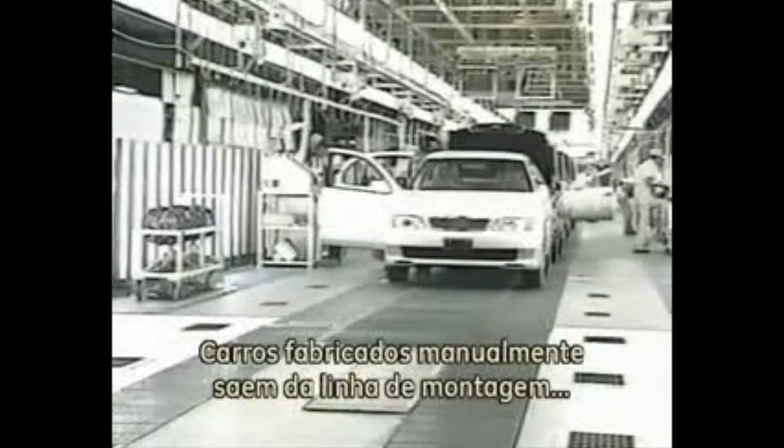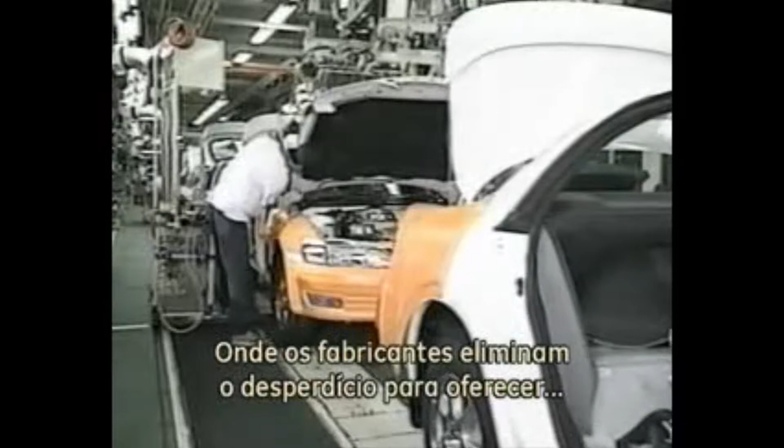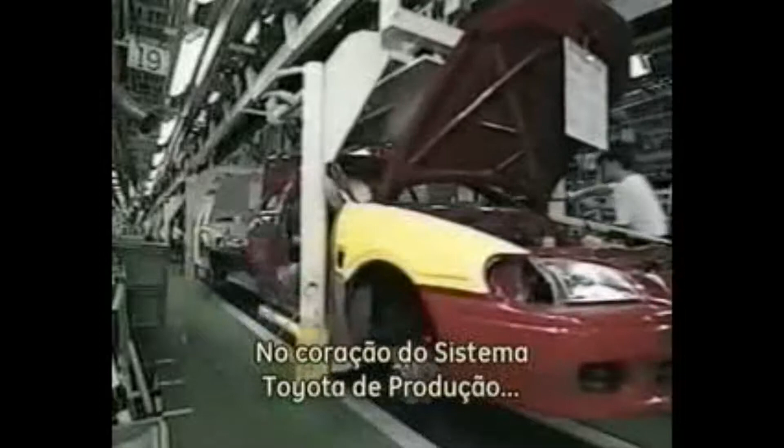Consistently crafted cars roll off the assembly line in a smooth flow. They are alive with the spirit of providing people with quality products through conscientious manufacturing and continuing research and development. This is the Toyota production system, where manufacturers eliminate waste to provide customers with well-made products in a timely manner. At the heart of the Toyota production system are the concepts of intelligent automation and just-in-time manufacturing. Let's explore the history of that system, which has transformed manufacturing around the world.

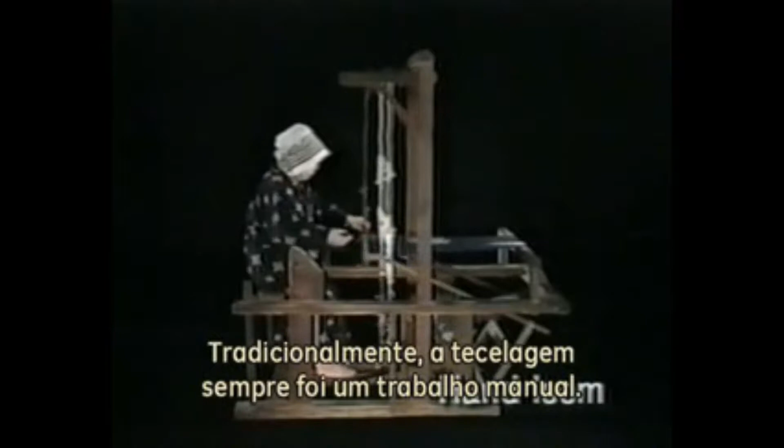The concept of intelligent automation, called jidoka, originated in looms invented by Sakichi Toyoda, the founder of the Toyota Group. Weaving traditionally had been a very manual kind of work. The weaver fed the horizontal yarn back and forth between the vertical yarns. Sakichi had watched his mother working at a manual loom and thought of ways to make weaving easier.

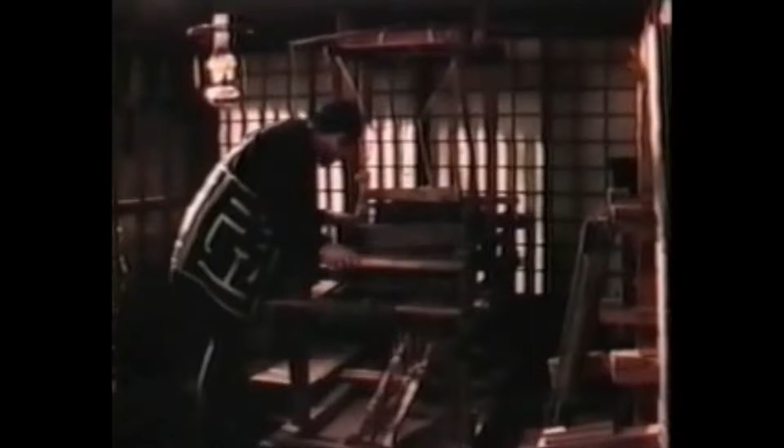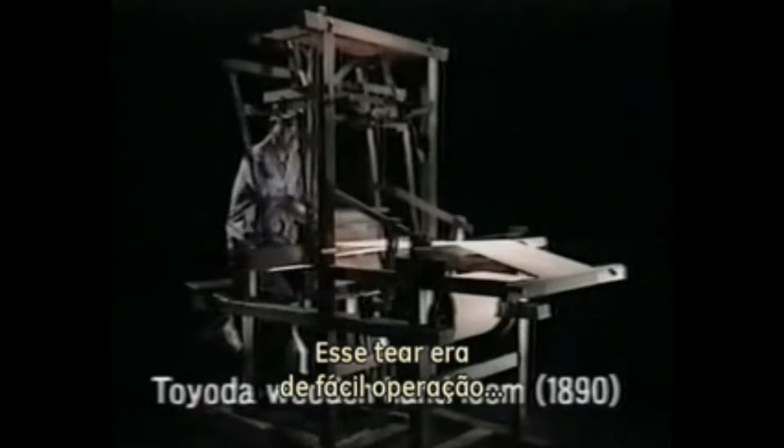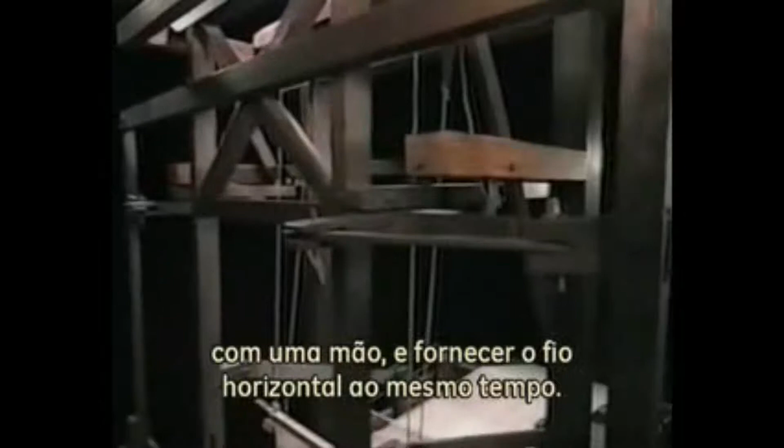He invented an original wooden hand loom in 1890. His loom was easy to use and nearly 50% more efficient than previous looms. The operator could move the yarn guide back and forth with one hand and feed in the horizontal yarns simultaneously. Sakichi then went to work on power looms. In 1896, he created Japan's first power loom, and he continued making one improvement after another.

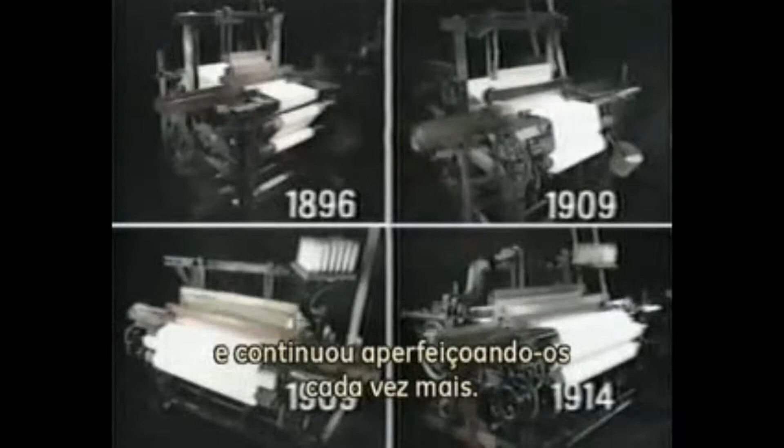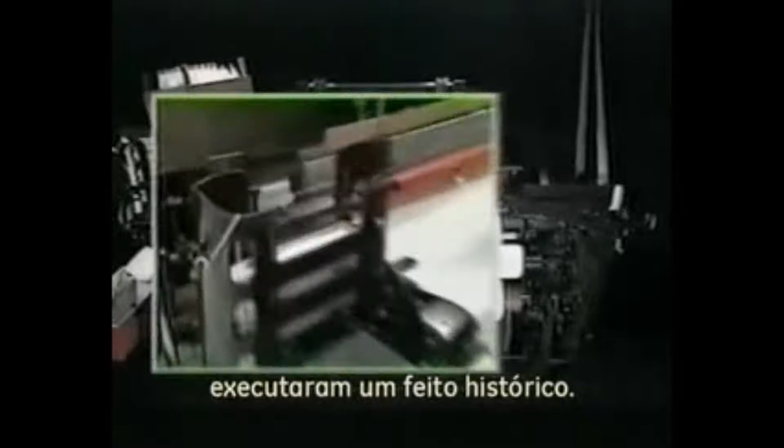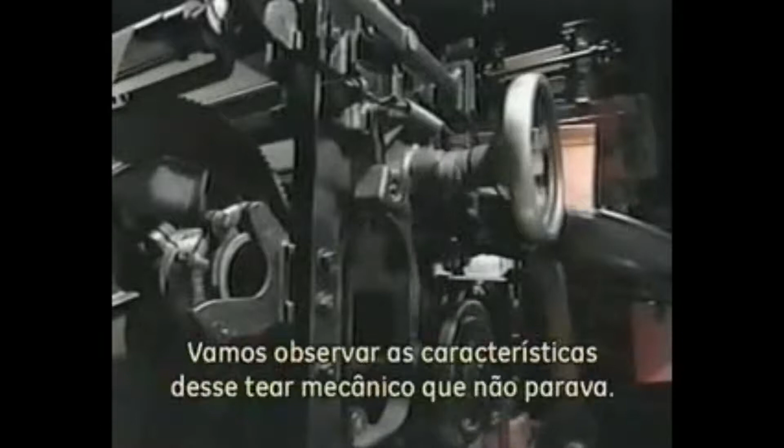In 1924, Sakichi and his son Kiichiro achieved a historic breakthrough. They created the world's first high-speed loom that fed in new weft, the horizontal yarn, reliably without interrupting work. Let's take a look at a feature of their breakthrough non-stop loom, the Model G.

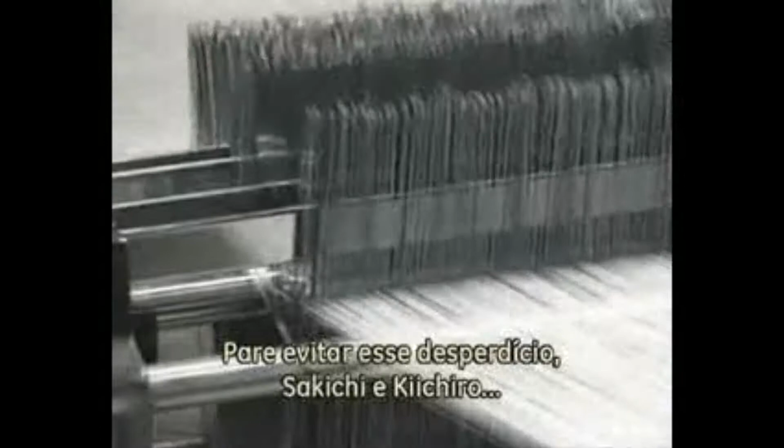Traditional looms wasted material on fabric like this when one of the vertical warp yarns snapped, as often happened. To prevent that waste, Sakichi and Kiichiro arranged thin metal floaters over the vertical yarns. A floater would slip down and stop the loom if its yarn snapped.

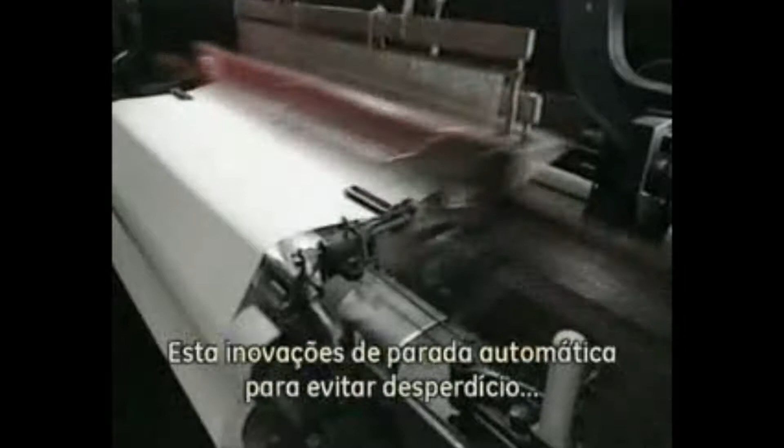These automatic stop innovations for preventing waste were absolutely remarkable. Sakichi had created sophisticated sensors, and he had done that without the benefit of the electrical and optical technology we now take for granted.

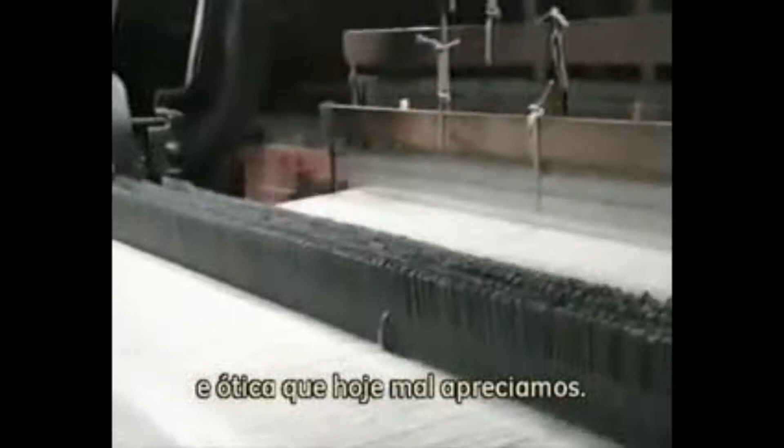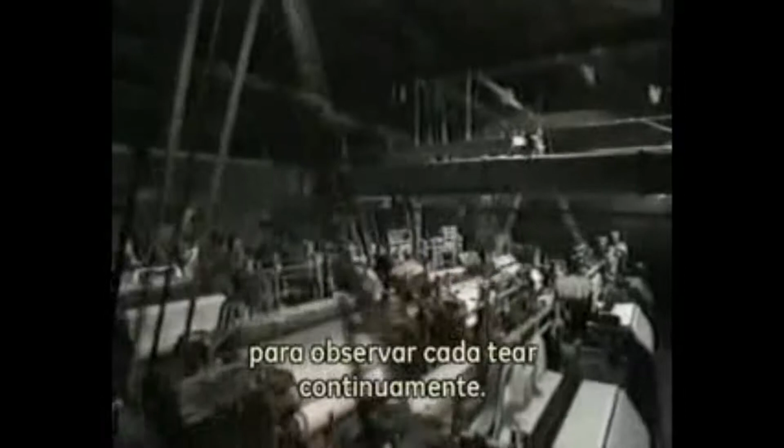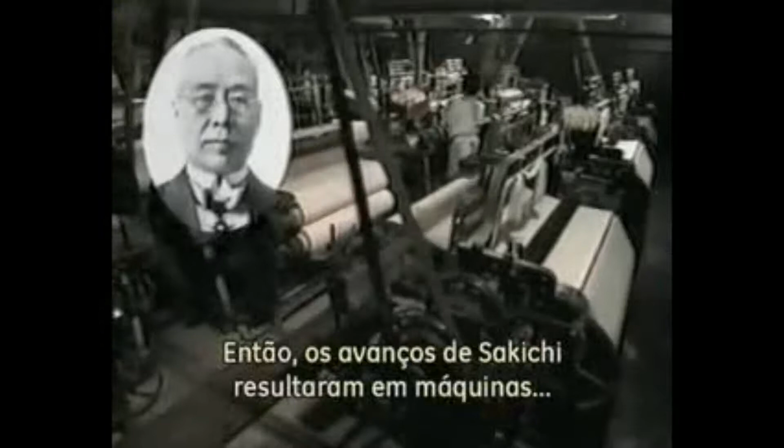His innovations eliminated the need for an operator to watch over each loom continuously. One operator could oversee more than 30 looms. The Model G captured a great deal of attention in Europe and the United States. So Sakichi's advances resulted in machines that would stop automatically if problems occurred, that would not produce defective work, and did not oblige people to serve as monitors.

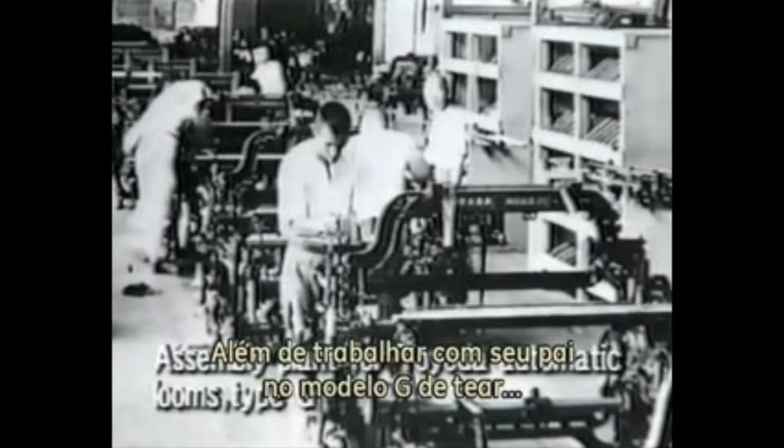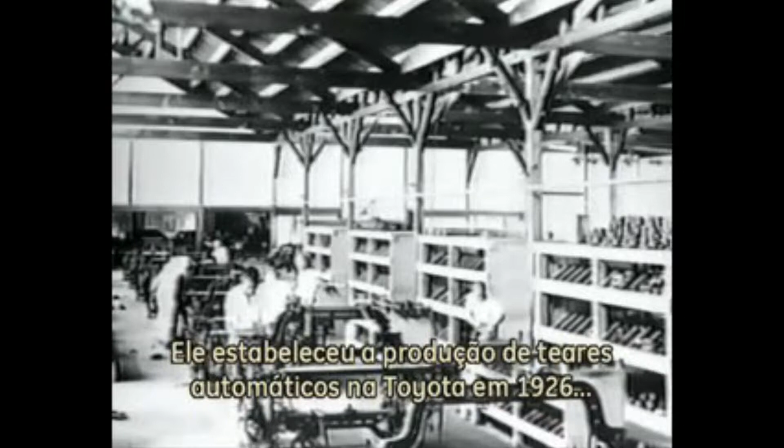The other core concept in the Toyota production system is just-in-time manufacturing. This concept originated in the ideas of Sakichi's son Kiichiro, who led Toyota into automobile manufacturing. Along with working with his father on the Model G loom, Kiichiro helped put in place a mass production system. He established Toyota Automatic Loom Works in 1926 and introduced American assembly line methods to produce the Model G loom.

Kiichiro traveled to Europe and North America in 1929 to find licensees for his company's automatic loom technology. He was amazed at all the vehicles and roads in the United States, and he resolved to begin developing automobiles. People tried to dissuade Kiichiro. They said that Japan didn't have either the technology or the economic foundation for a viable car industry.

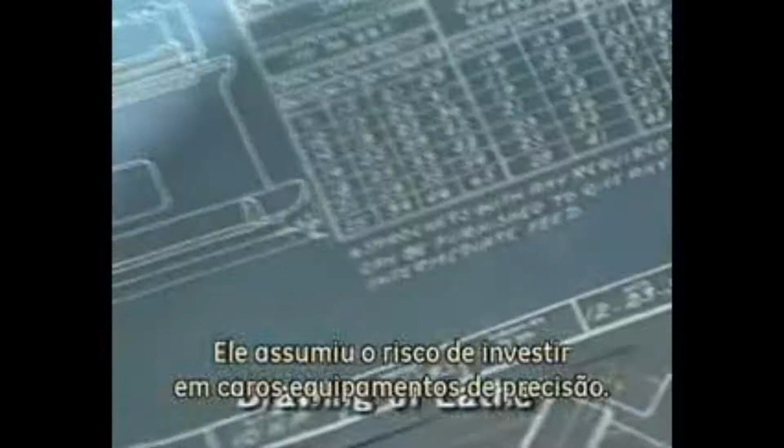But he ignored their doubts and set up a shop in a loom factory to develop small engines. He undertook the risk of investing in expensive precision equipment. In 1935, his team created a passenger car prototype, the Toyota Model A1. In the following year, the first Toyota passenger car went into production as the Toyota Model AA. Kiichiro incorporated his automobile operations in 1937 and began work on a vehicle plant.

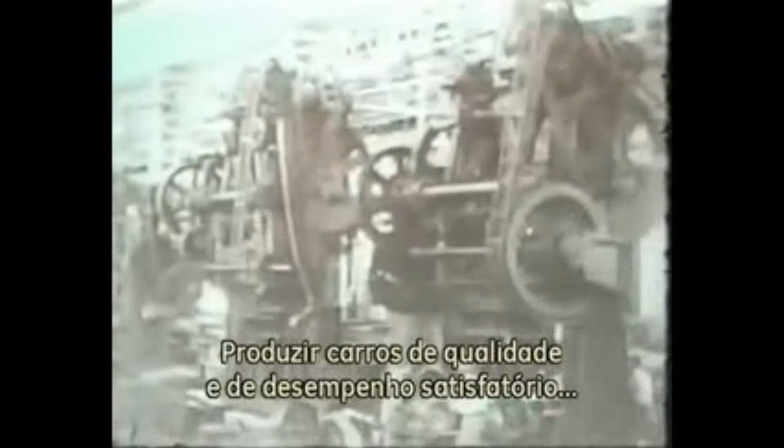He refined American mass production methods for his plant and developed the beginnings of just-in-time manufacturing. The idea was to eliminate waste by making only what was needed, only when it was needed, and only in the amount needed. Making quality cars of satisfactory performance required an all-out effort. And Kiichiro was moving to refine just-in-time manufacturing further, but the outbreak of World War II in 1941 interrupted his efforts.

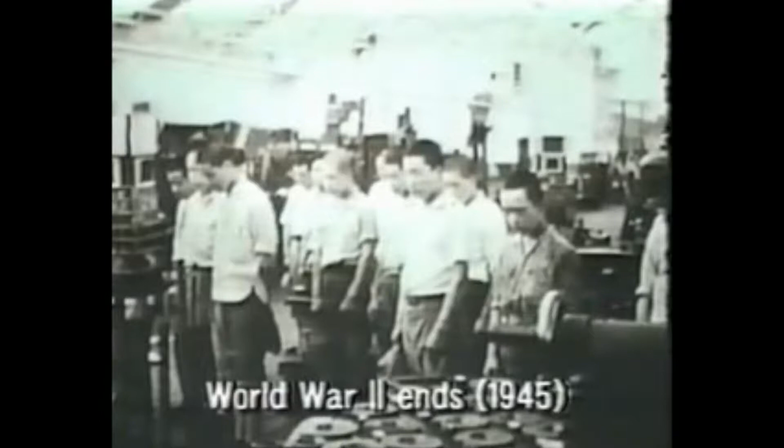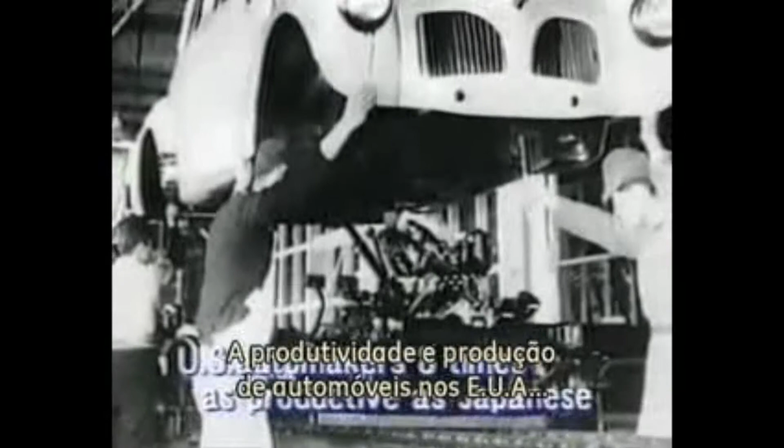After the war, Kiichiro passed on his dream to his cousin Eiji. He instructed Eiji to bring the company up to U.S. standards of technology within 3 years. That was a daunting task. U.S. productivity in automobile manufacturing was 8 times higher than Japan's, and Toyota was short of equipment and capital. So raising productivity was a pressing issue. Eiji assigned a machine shop manager by the name of Taiichi Ohno to develop a more efficient production system.

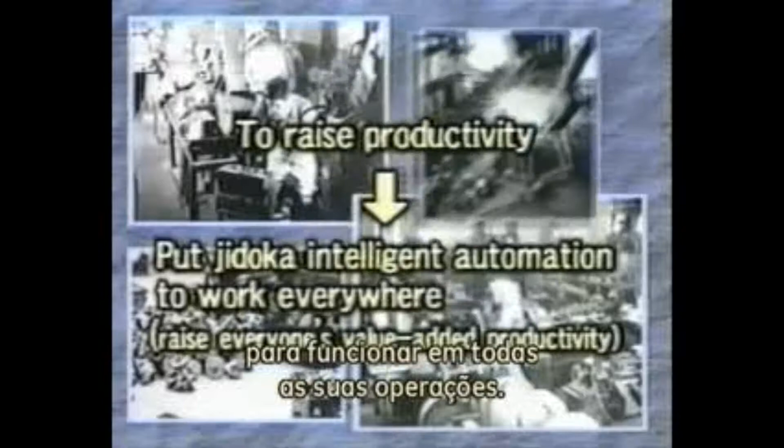The two men looked for ways to raise the value-added productivity of every worker. They did that by putting Sakichi's JIDOKA concept to work throughout their operations. They also looked for other ways to stretch their limited resources of equipment and capital, by putting Kiichiro's just-in-time concept to work systematically.

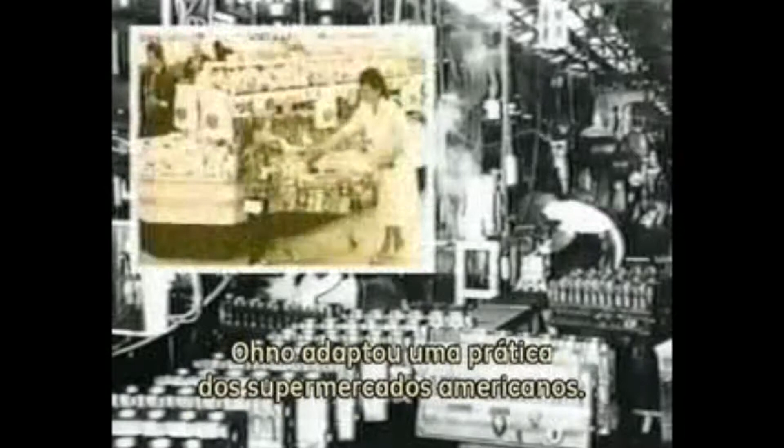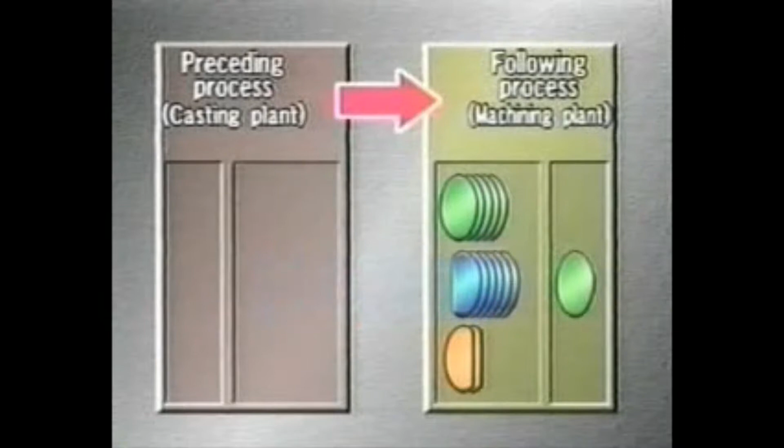Ohno took a cue from the U.S. supermarket. He made each process the customer for the preceding process. In traditional manufacturing, processes delivered parts to the following processes regardless of what was actually needed.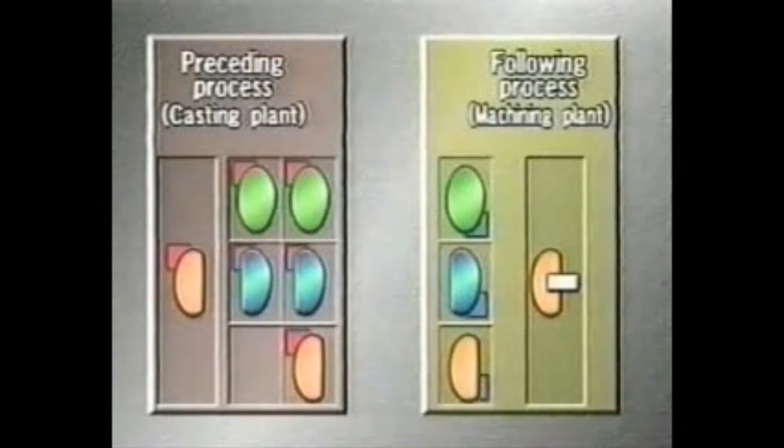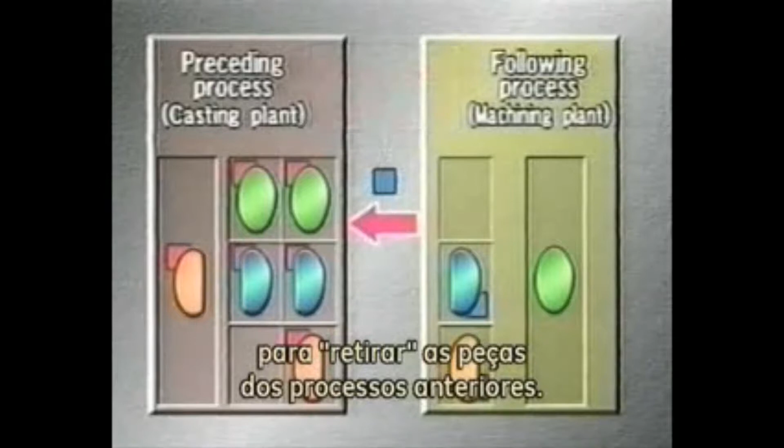Ohno devised a completely new kind of system. Processes used KANBAN cards removed from parts they had consumed to withdraw parts from the preceding processes. Kanban on the parts arrayed by processes came off when the following processes withdrew the parts. They became instructions to make additional parts. The Kanban flow ensured that processes made parts only to replace parts actually consumed by the following processes.

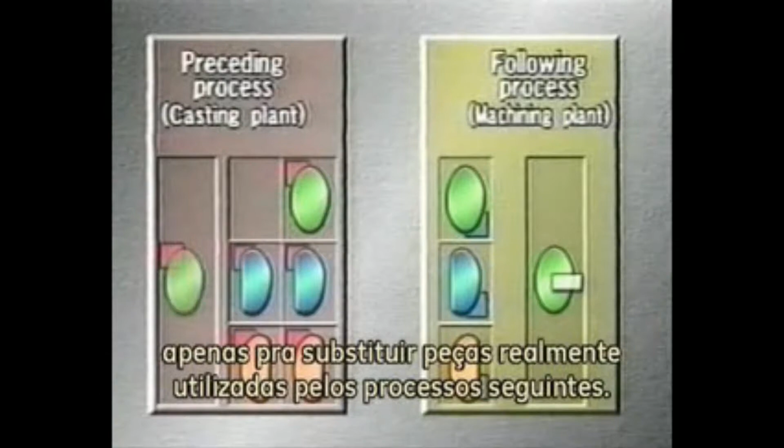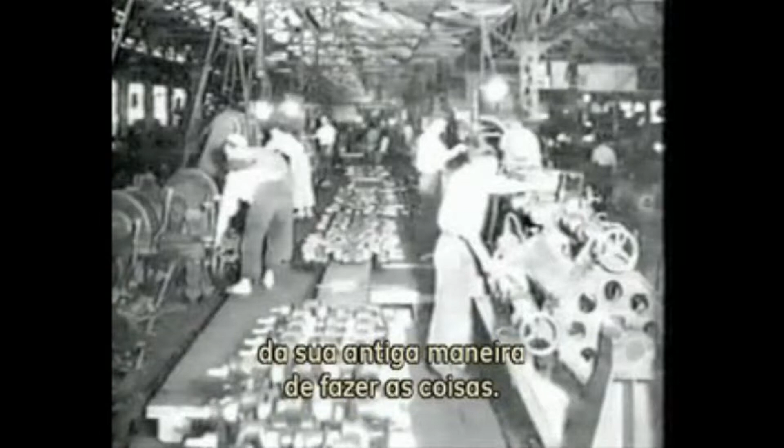Active cooperation by the people in the workplace would be essential to Ohno's system. But at first, people were reluctant to give up their old ways of doing things. Ohno took the initiative. He went into the workplace and taught people how to use his system.

Eiji Toyoda supported Ohno enthusiastically in putting the new production system in place. A new production system gradually took shape on the foundation of just-in-time manufacturing and JIDOKA intelligent automation. As the Toyota production system, it became a standard for manufacturing industries.

The Toyota production system gained global attention after the oil crisis of 1973. Toyota recovered more quickly than other automakers from the crisis, and its production system received much of the credit for that resilience.

General Motors Corporation approached Toyota about setting up a joint venture to make small cars in the United States. The two companies set up New United Motor Manufacturing Incorporated in California in 1984.

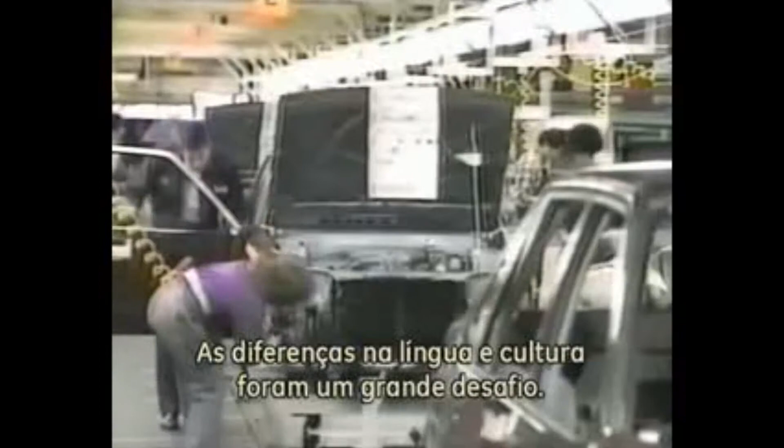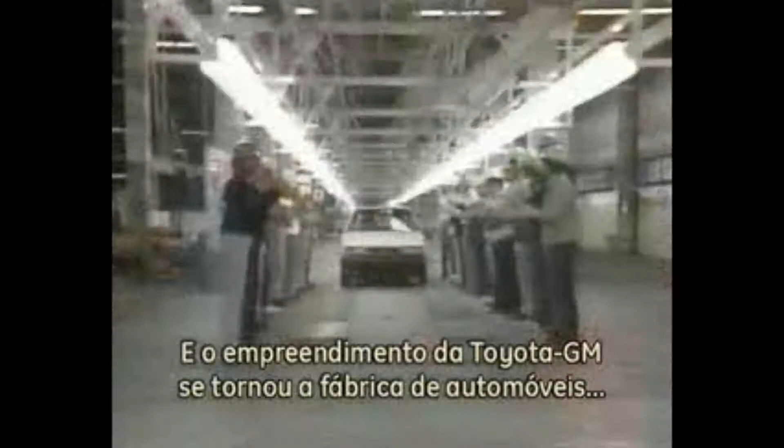Differences in language and culture presented big challenges, but the spirit of making things well knows no borders. People accepted the Toyota production system, and the Toyota-GM joint venture became the highest-ranked automobile plant in the United States for quality. It became a symbol of successful industrial cooperation between Japan and the United States.

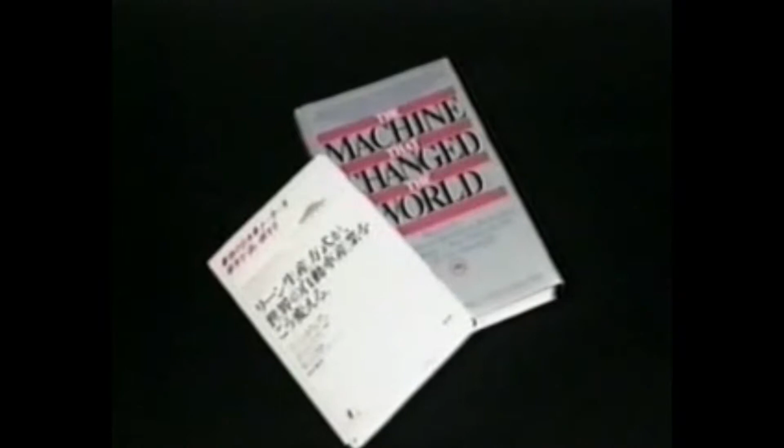A book published by the Massachusetts Institute of Technology hailed the Toyota production system as the machine that changed the world.

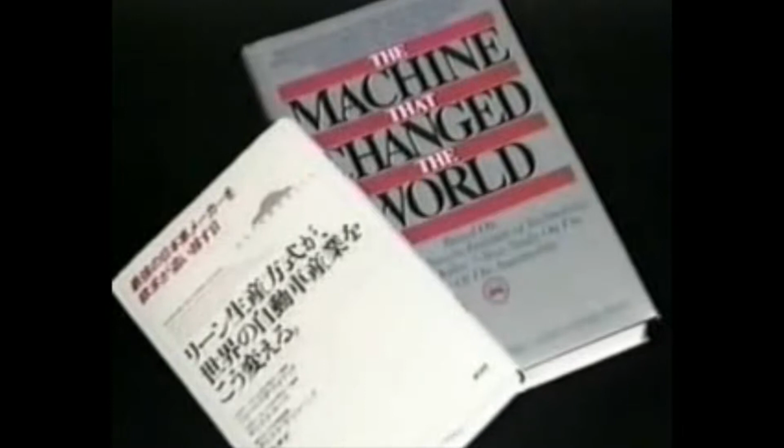Today, the Toyota production system has gained a worldwide following. Let's see how the system now operates in the world's most modern automobile plants.

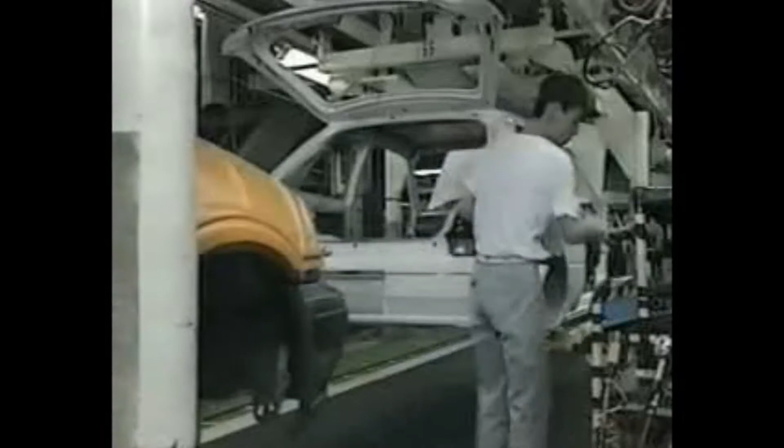The trucks that deliver parts to the plants carry a variety of items in each load. That allows each truck to travel fully loaded, which minimizes trips and thus reduces traffic congestion. Forklifts carry the parts unloaded from the delivery trucks to racks alongside the assembly lines.

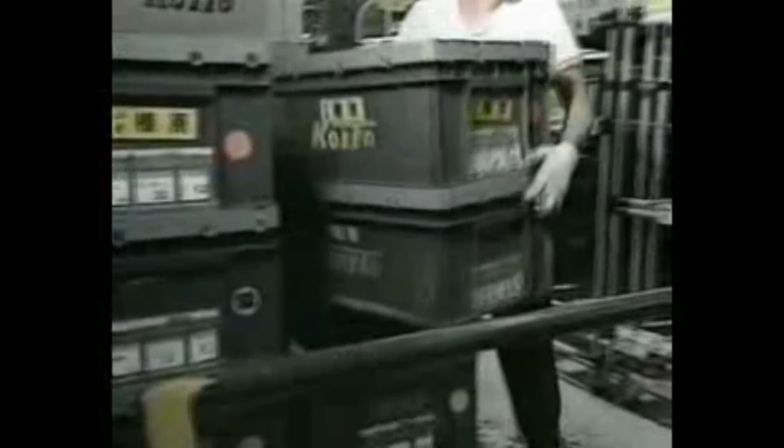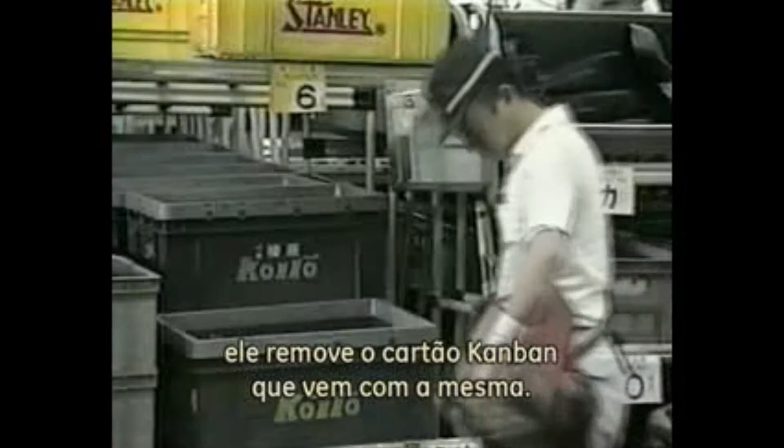When people on the assembly line use the parts, they remove the attached KANBAN cards. The KANBAN get picked up regularly and sorted. The delivery truck drivers pick up the KANBAN for their company or companies before leaving. Back at the supplier's plants, the KANBAN become orders for withdrawing additional parts.

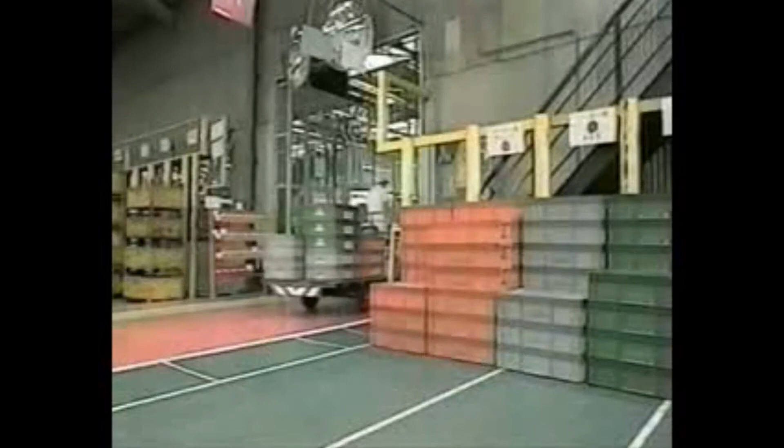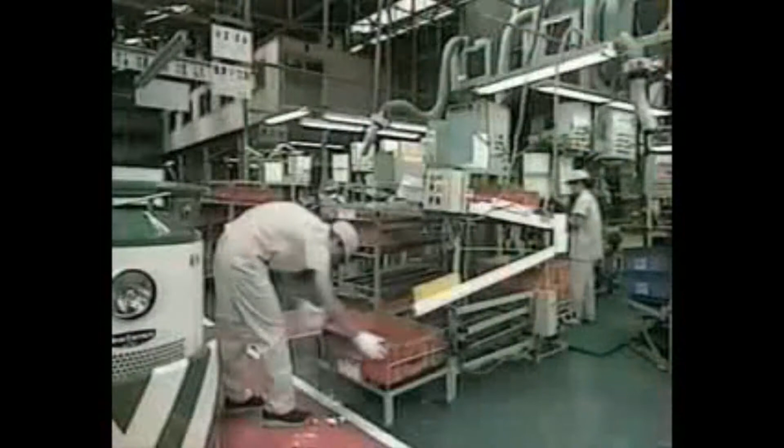Sorting arranges the KANBAN according to area in the plant. Shipping personnel exchange the KANBAN and empty boxes for full boxes. The production processes in the plant make additional parts only to replace parts that have been withdrawn. That prevents the wasteful buildup of inventories.

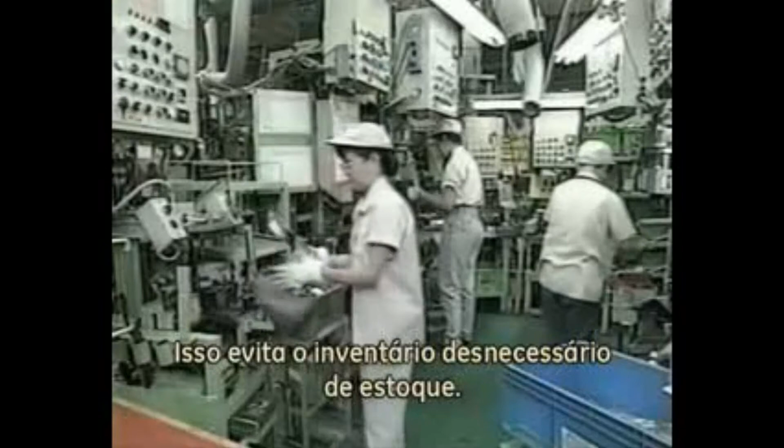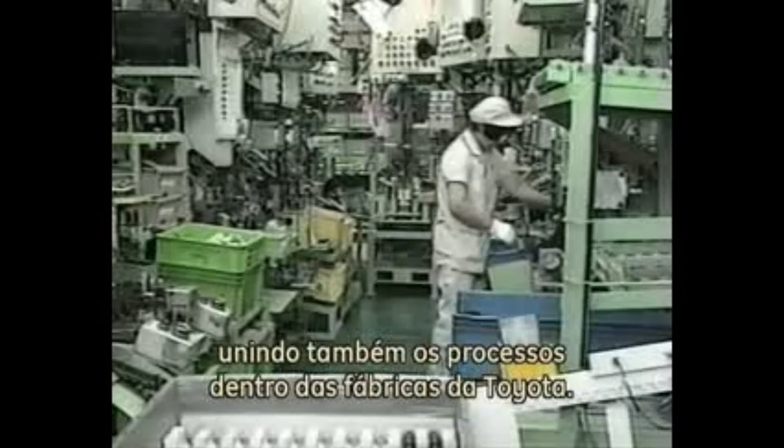When the shipping personnel have gathered a full truckload of parts, a truck carries the parts to the vehicle plant. KANBAN thus link Toyota plants with suppliers' plants, as well as linking the processes inside the Toyota plants. Just-in-time manufacturing minimizes inventories, eliminates waste, and maximizes productivity at all the plants that participate in the Toyota production system.

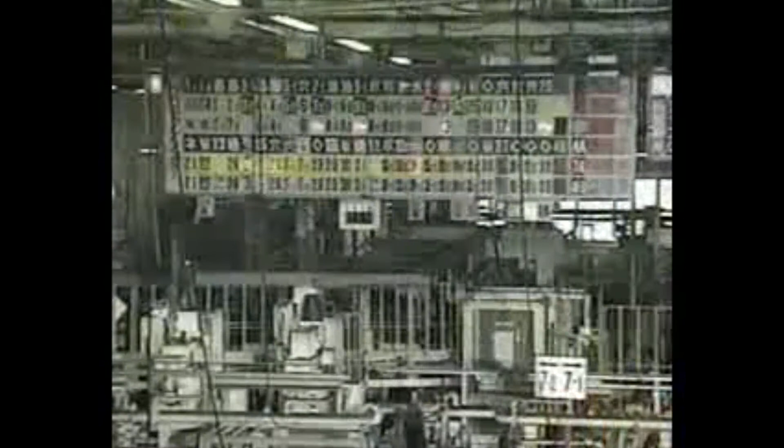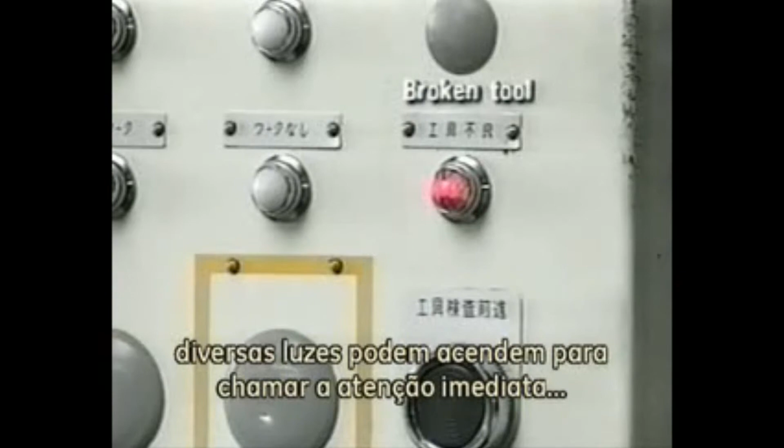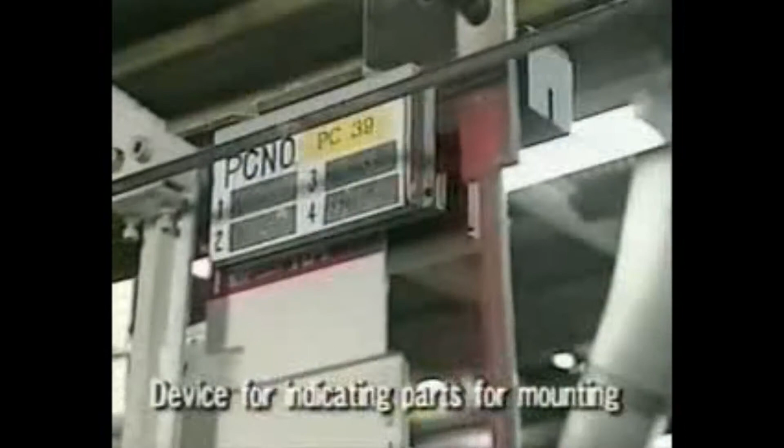JIDOKA intelligent automation also continues to play a big role in the system. On automated machining lines, various lamps light up to call attention immediately to any problems detected by sensors. On assembly lines, the employees themselves have devised countless JIDOKA measures to prevent defective work.

So Sakichi's concept continues to prevent waste. The idea is to build quality assurance into every process, and it works.

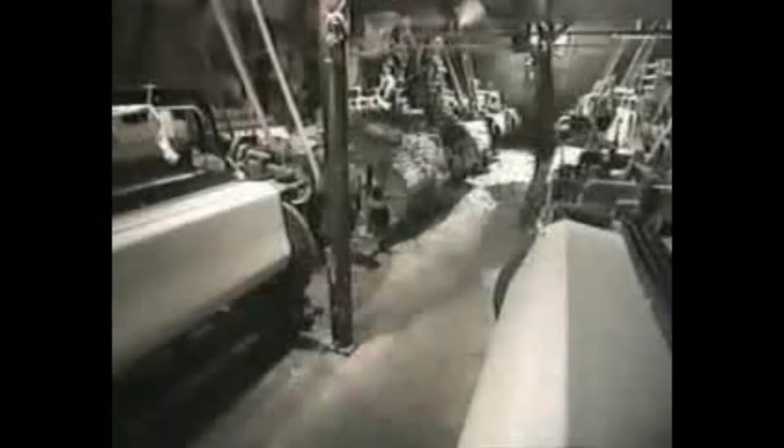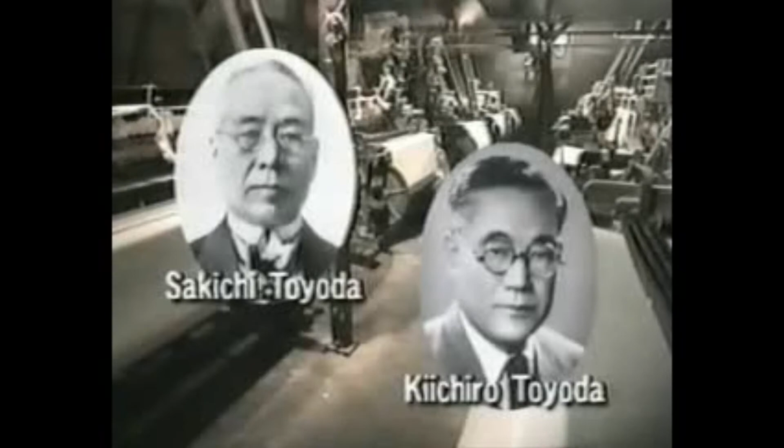The foundation for the Toyota production system has been established by Sakichi's JIDOKA intelligent automation and his son Kiichiro's just-in-time manufacturing. Taiichi Ohno and others put those concepts to work systematically with the strong support of Eiji Toyoda and his passion for manufacturing.

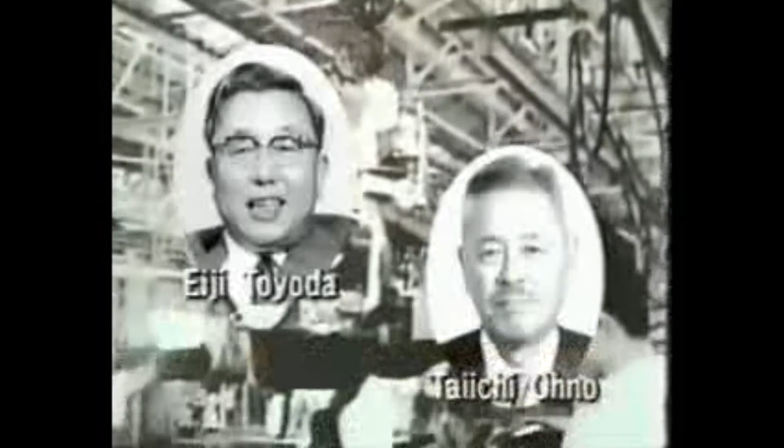The Toyota production system continues to evolve in response to changing needs and circumstances, but the fundamental concepts are eternal, including Toyota's commitment to continuing improvement in every phase of products and operations. Those concepts underlie a lasting contribution to enhancing the quality of life for people everywhere.